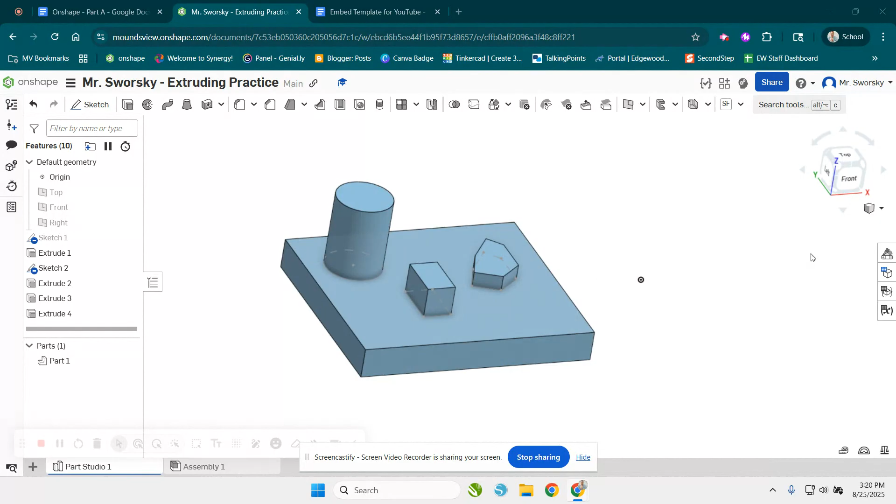We're going to use our existing shape that we just made. To be honest, I better do it like you would, because remember in our requirements we needed 4 shapes. So I'm going to add one more, and then extrude this one so we've got the same amount. Why not make it 25 also? There we go, now we've got our 4 shapes.

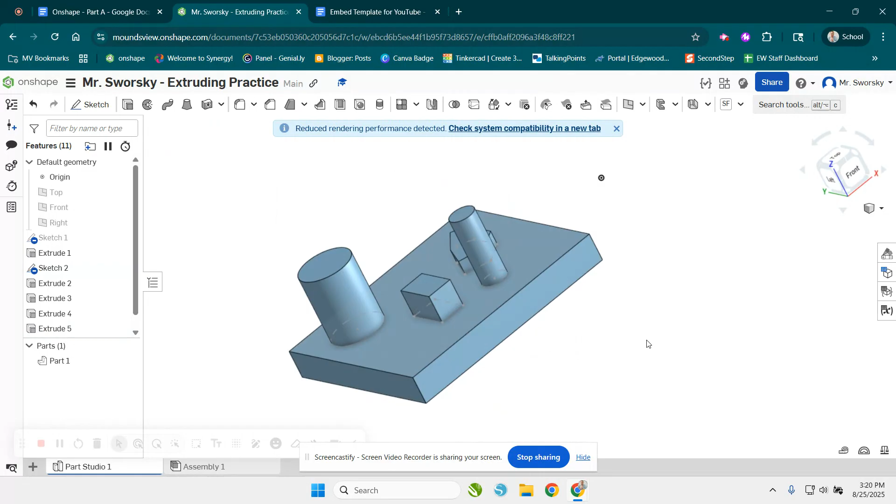So the example, or the one that you practiced and took a screenshot of, should look something like this. Could be a rectangle, circle, stuff on circles, stuff on squares, rectangles, custom shapes, all that good stuff.

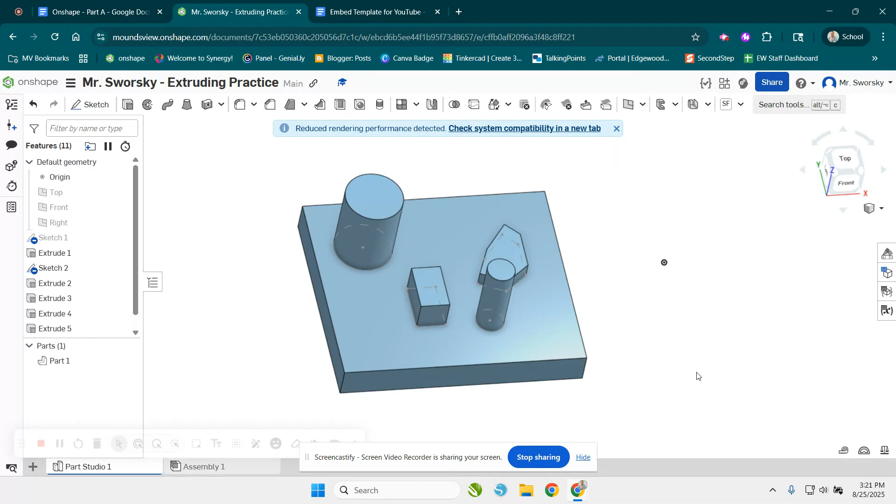Now you say, well, what if I want to put a hole in it? That's when we do remove extrudes. And the way we do that is I'm going to click, and I'm actually going to do another sketch. So I'll go to sketch. Let's just add a rectangle to make it easier on ourselves. Now I have this rectangle right here.

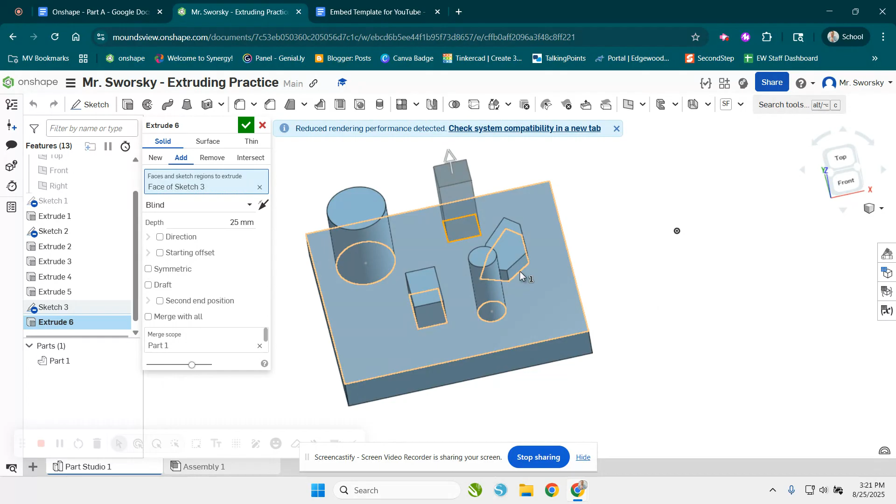I'm going to extrude. Right now it's going out - here's how I can change that. If you go into your little tab here, you'll see it says add. If I just go over, watch what it does - it says remove. Now I just went through it. See how the arrow is going through? So it's showing me how to go down, down through my shape here.

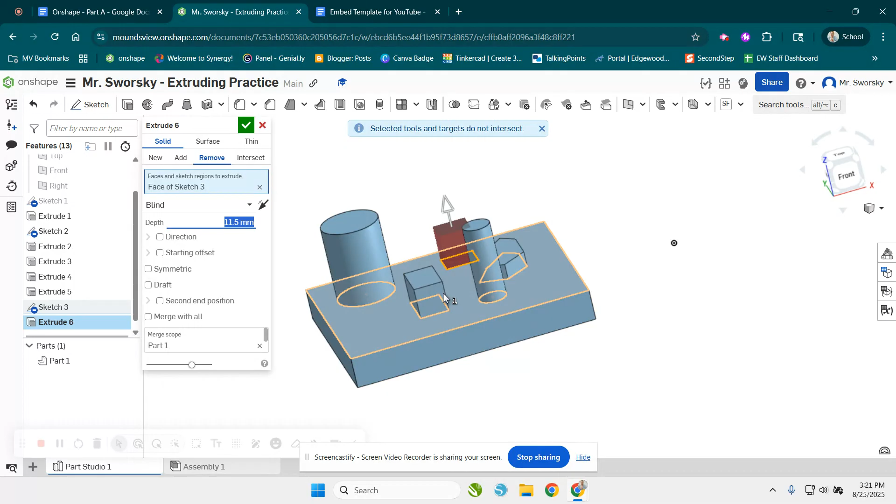You'll notice if I go up, it's going to turn red, because everything above that I can't remove. It's saying, whoa, you can't remove anything above there - it's telling you that you're doing something wrong. I can't remove anything above that shape because there's nothing there to remove. So I'm going to push down here, and as long as I'm all the way through it, I'm going to make a hole.

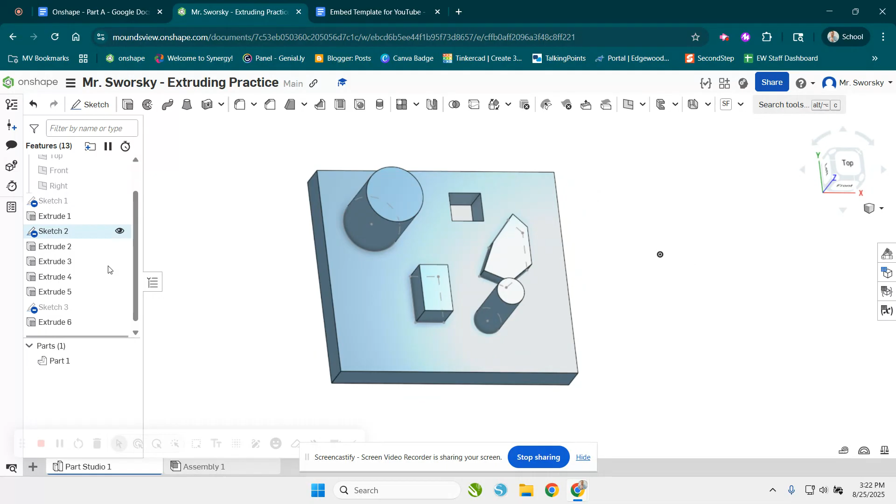So if I give myself a thumbs up, watch what happens - and you see I just made a hole all the way through my shape, which is cool. The other way I can do an extrusion is make it a little bit, not go all the way through - just kind of make an indent like that, which all have their place and purpose when you do that.

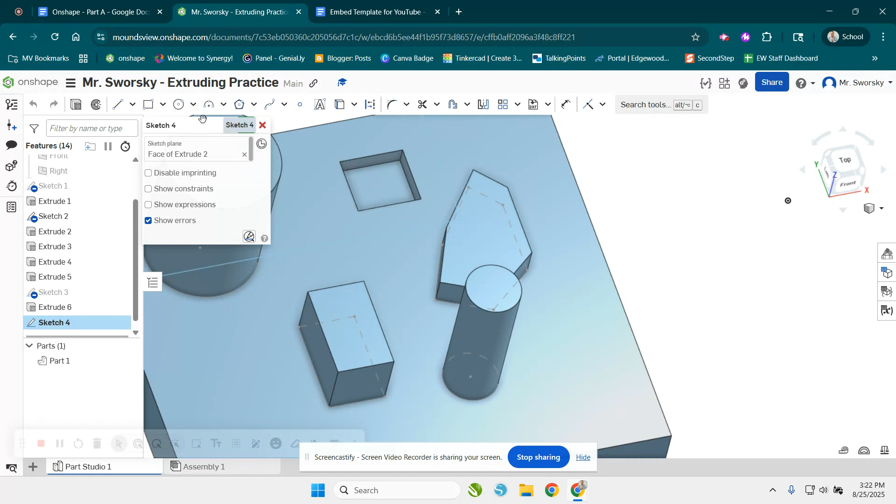Okay, and I can do it again. If I want to make a hole through this, I'm going to do a sketch. Let's make a hole. Let's extrude that - but I don't want to add it, I want to remove it. So I can go through, all the way through. Now look what happened - made a hole.

Isn't that cool? So those are my remove extrudes. I can go all the way through like I did with this one, or I can remove extrude and just take a little bit of material out, not going all the way through the thing. But that's the cool thing about remove extrudes - I just did 2 remove extrudes.

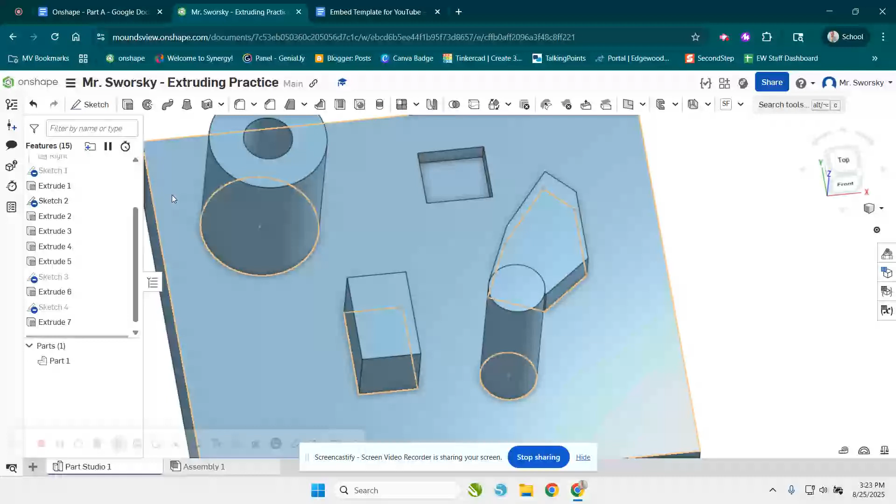In your practice here, you are going to do the same thing. So you're going to take your multiple extrusion shape that you just made, and you're going to add 2 remove extrudes and practice that. So have some fun with it, see what you can make. Excited to see it - see you on the next video.